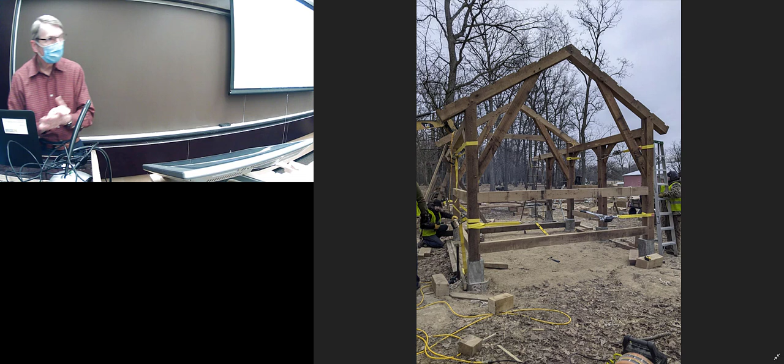Okay, a couple of different things we're going to do today. Mainly talk about I-Joists, but I thought I would show you first a couple of slides that I got from this weekend.

A friend of mine who lives over on Joy Road, just off of Whitmore Lake, not too far from here, built this little mini barn this weekend, or at least erected the timber frame part of it. So he had a little party—it was a real barn raising. Invited some friends over, and they lifted these pieces into place.

The way he did it, and traditionally, you build the frames flat on the ground, and they're all mortise and tenon and pegged. You can see there are pegs that hold it together. So there's a piece from this that goes up into that, slots into it like a pocket, and then the peg holds it.

Let me see if I can go through these slides. I don't know exactly how this is going to work. Maybe not so well. Does that do it? No. Huh. Okay, sort of. I don't know. I'm trying to see where the controls are on this. If I expand it, then I should be able to do that. But if I expand it, I don't see that. See, oh, there it is, okay.

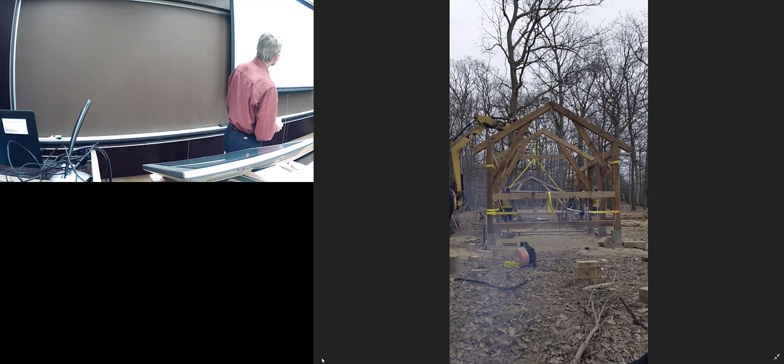So like I said, they build it in bents on the ground, and then they did have a little hoist there. Traditionally, you just lift this up by hand—people would push it and tilt it into place—but obviously a little bit easier. The red oak is pretty heavy wood, so that weighs a good bit. So they just lift it up on the straps, and then they position it.

You can't quite see, but in the back there's another couple of piers. They had concrete foundation piers that they dropped it on. There they go. And then they brace it once you get it up into place, and they put temporary bracing on it until they get the next set of beams connected to it.

So I think that's probably close to it. They just pull it. Yeah, doing it like this, it's probably a little easier because you can position it a little on the, actually lift it. Traditionally, you position the base in and then pivot it up, so it's already at the location. But this, I guess, worked a little easier for him.

Does it sit on the concrete? How does it sit on the concrete? There's a little bracket that holds it—I believe that's the way I've seen it before.

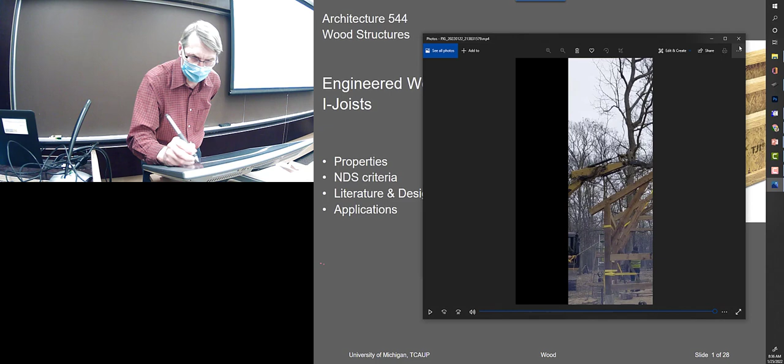Okay, so this one I should be able to shut. Oh, okay, there we go.

So this was from some pictures he made on Sunday. They did this Saturday, and by Saturday night they got the purlins up on it. You can see here pretty much how it's pegged in place. These pieces are normally a little bit higher, but I guess because it's so small, he dropped these a little bit lower. It's only about, well, he told me like 15 by 20 or 10 by 20 or something. It's not really very big. This is supposed to be for his 2 cows, I think.

But then after he built it, Sunday he was saying, I don't know, it looks so nice, whether I'm going to let the cows live in it. I may use it as something else, some other space.

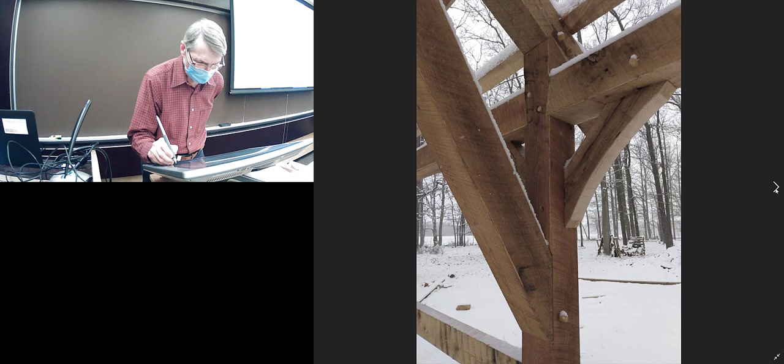Anyway, let me see if I can still go through a couple more pictures. There you can see the pegs, and there's the whole thing with the purlins on it. Pretty heavy purlins - I don't know that they needed to be that big because he's just going to put a sheet metal roof on it.

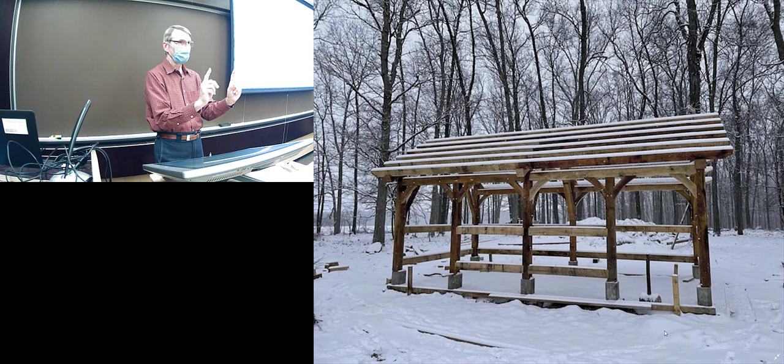And it's up on - yeah, what you can't see too well, there should be some steel brackets that attach right down here onto that were then tied to the concrete. Like bolted - you'd normally cast threaded rod into the concrete, and then you'd put the bracket on and screw the bracket down, and then screw the bracket into the wood. But I don't know, I can't quite see whether that's what they did or not.

It looks like there's a steel - I don't know, I'll have to see. I wasn't able to visit the site Saturday afternoon. My son went, and he took these pictures for me, so I haven't actually gotten to get out there and look. But anyway, thought that would be kind of fun to look at there.

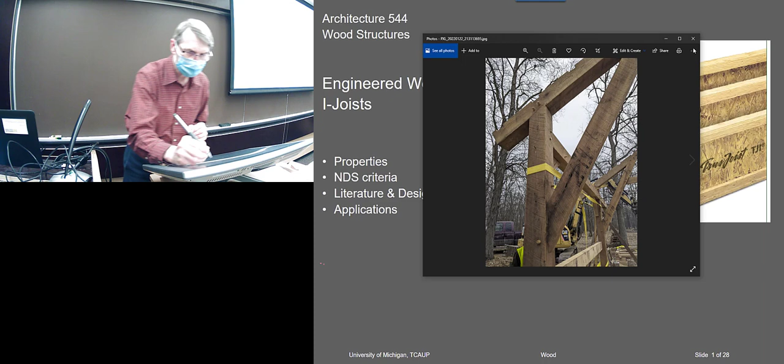Next thing we can talk about, I want to show you the wood of the day. And since that was all done with red oak, I thought, oh, how appropriate, we'll take red oak. Here's a beautiful piece of red oak, and you can compare it to the Douglas fir that's also kind of a reddish color. The color is a little bit similar - if anything, the Doug fir may be more red. But the red oak, if you look at the grain, very different grain, very typical, more grain that you'd expect from a hardwood, as opposed to this, which looks very much like the wide, broad grain of a softwood.

The other thing that oak has that really distinguishes it, and I'm not sure what these things are called, the pores - it has these darker pores. I think they're called... did it say in here? Tylosis, or something - it has some weird name. But oak has those in particular. Tylosis - well, no, I don't think that's quite it. Anyway, whatever. You can see it has these darker pores, which is typical of oak. Both white oak, all the oaks have those.

Otherwise, the red oak, too, if you look at it closely, it kind of has holes - I mean the grain has gaps in it a little bit. You look at that closely, you can see it's not as solid as even the Doug fir has. There are no little holes in it, but there are if you look. And in fact, look at the end of it - if you look at the cut end, you'll see those pores are open in the red oak. This is different - the other oaks are not like that.

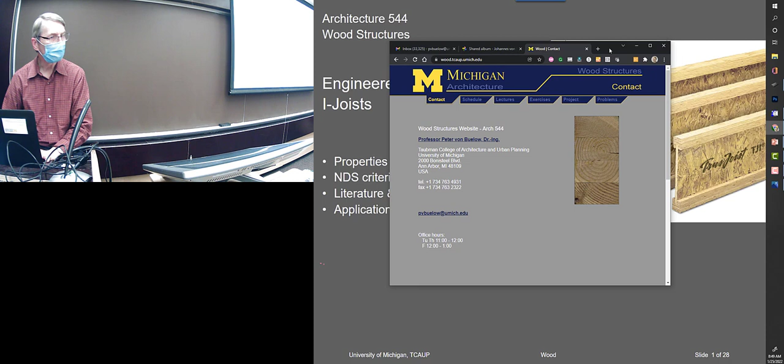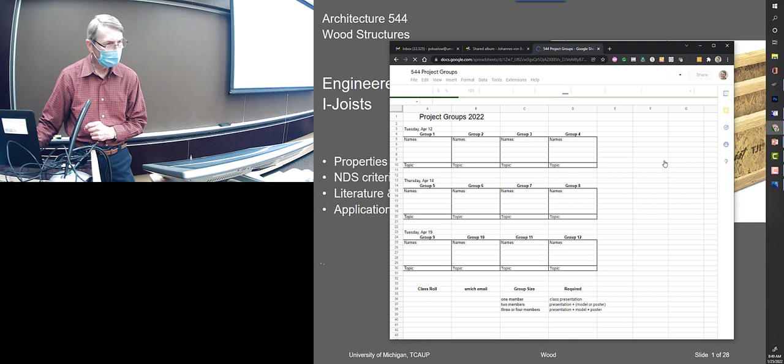Okay, there we go. A little bit here, you can look. There is, eventually for that project, a sign-up sheet. I don't think I've connected the link to it yet, I'll do that this afternoon, so you should be able to click on this. This will probably go to last year's, I bet. Oh, look at that, okay. Huh, maybe I did update it - 2022, totally forgot.

Okay, so you can go to this page, I guess, and start to choose your group, choose a topic, however you want to do that. Okay, let's see.

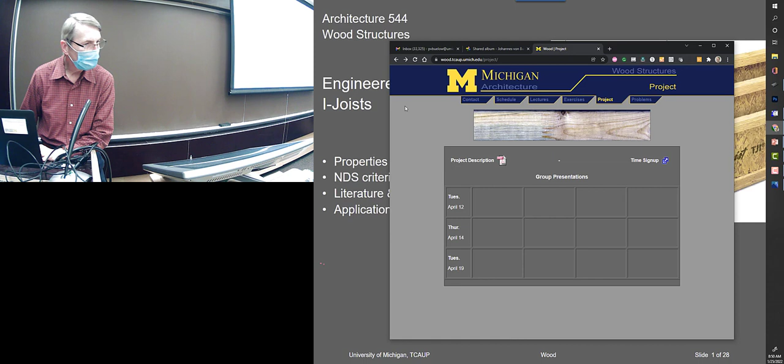The other thing I was going to point out, I went through and revised our schedule a little bit because I think we got a couple days ahead - we covered the wood beams more quickly than I thought we would. So I don't know if you pay attention to the schedule, but this is slightly revised from what it was earlier, and we are here today. We're doing I-joists actually.

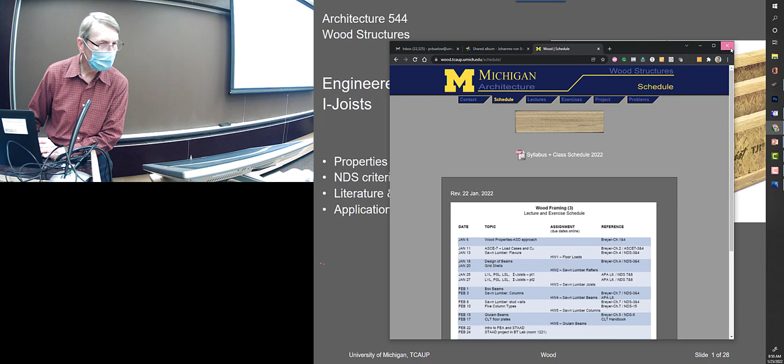Well, then today I thought we'd go ahead and talk about engineered wood products, specifically IJoists. There are sections in the NDS that cover engineered products.

Let's see what we've got here. 5 is glulam, and then we get into composite lumber, which we'll talk about Friday. That's in 8. Somewhere I thought we had structural panels, okay, cross-laminated timber. How am I missing it? Maybe it says it in here somewhere.

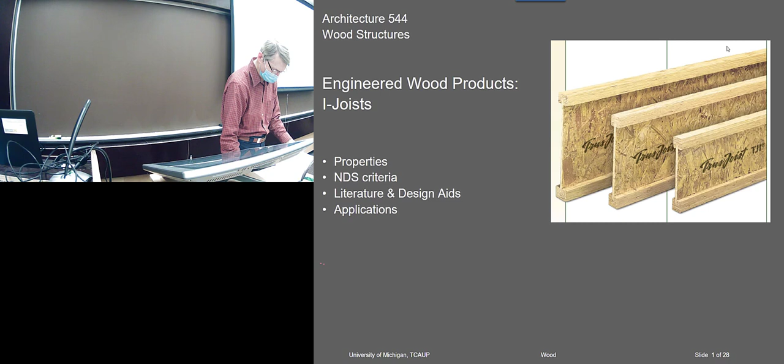So hard to keep the mouse on the... Okay, let's see if this works. Well, there is a chapter on IJoists in the NDS. Maybe it's 4. Trusses, sawn lumber. What the heck? Look in the table of contents.

Composite. Oh, here we go. Chapter 7. How did I miss that? Chapter 7 is prefabricated IJoists. But most of what they'll say in that chapter is very short, something like three pages. It refers you to manufacturers' literature. So yeah, chapter 7 is literally 1, 2, 3 pages.

Not too much there. Okay, what these are, we can pass around these samples of them, and you can look particularly at the tops of these. Some of them - this one looks like it's SPF, this one is LVL, and this one is a solid piece of wood. So it's up to the manufacturer - you can see 3 very different pieces.

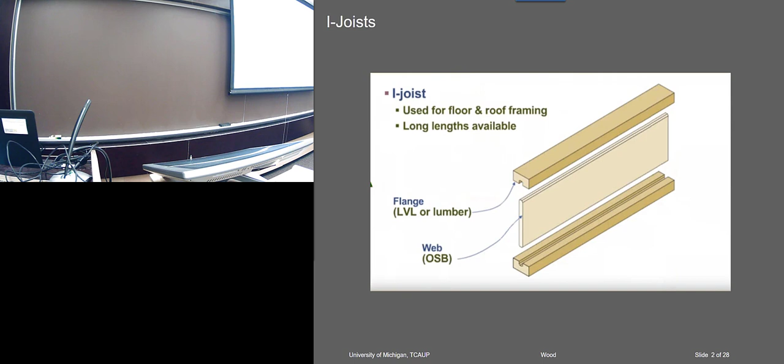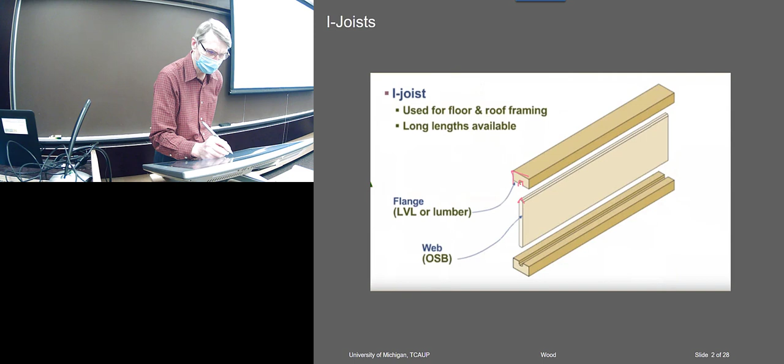The web is almost always OSB, but the web could be plywood as well. So they've got a good bit of latitude in how they manufacture these, and then they produce their own specifications in terms of strength. So you have to get all that from the actual manufacturer. But they're all fundamentally the same in that they have a flange right up here, this part that's got a cutout in it. This web then is tapered and is pressed up into that groove and glued. So then it's glued together.

And you end up with something like this versus the solid lumber like this. So you can see it's quite a bit lighter. You also have greater control over the depth of it. You can make them much deeper. Some of them are made like 30-something inches deep, quite deep, which gives them a long span. Really, the only thing that limits the span is the transport of them, right? So they could be up to 60-foot lengths, although they're usually not that long. They're usually used in residential construction, so they're more like 40-foot length max or something in that range. But they can be manufactured to be even longer. So I suppose the deeper ones probably are.

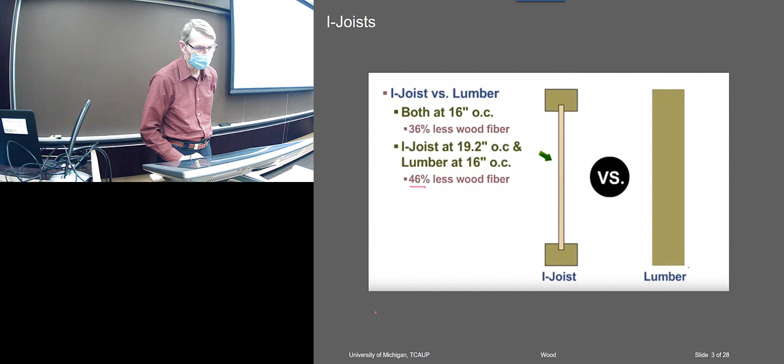46% wood, less wood. Okay, so they're lighter for sure. The only real drawback, and we talked about these before, is that they aren't really waterproof. So you can't use them in any exterior applications. You can't use them for a deck or something where they'd get wet, and that's mainly because the OSB will come apart. It's not going to be able to stand up to water. So I don't know, maybe if you made them with marine grade plywood, maybe you could get something that would be better outdoors, but I don't think anybody does that. There's no real application there.

There is quite a bit of literature, and of course you can look online and just find the APA has a big site. APA used to be the American Plywood Association, and then they kind of expanded their scope to include not just plywood, but basically all manufactured wood products. So they kept the name APA, but APA actually stands for the Engineered Wood Association. So it's kind of a funny thing - the acronym is APA, but their title is the Engineered Wood Association.

They produce quite a lot of literature, and a lot of it I've put up. If you go to our Canvas site, there's a section just called Files. If you look in that Files section, I've dumped a ton of literature that you can download. I try to keep it updated. E30 is one of the main pieces of literature - I probably even have that on here. Is this E30? Yeah, this is an older one. But it includes this engineered wood - includes the IJoists, but also, I think this is a pretty broad document. Includes all the, right, like it shows here, glulam, OSB, this is probably LVL, the different manufactured products.

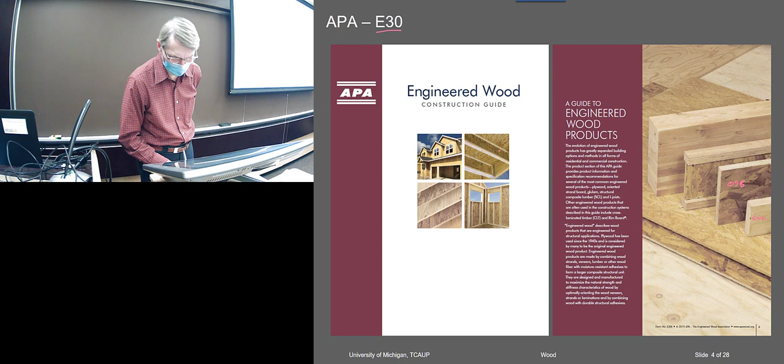They also have specific literature on I-Joists. This is APA—they're not a manufacturer, right? They're just the agency, or what would you call them? They do have some charts in this literature that give spans and whatnot, but they're not generally used for that. Yeah, here they have some span—this is, I think, 400?

No, it's a different one, but this is also APA's. The main source for when you go to design it would be directly from a manufacturer. So you'd go to like Weyerhaeuser, a big supplier, and get their literature. I don't know if I have any of theirs with me, but in the files on Canvas there's a bunch of their literature, and we'll look at some of their tables a little bit later.

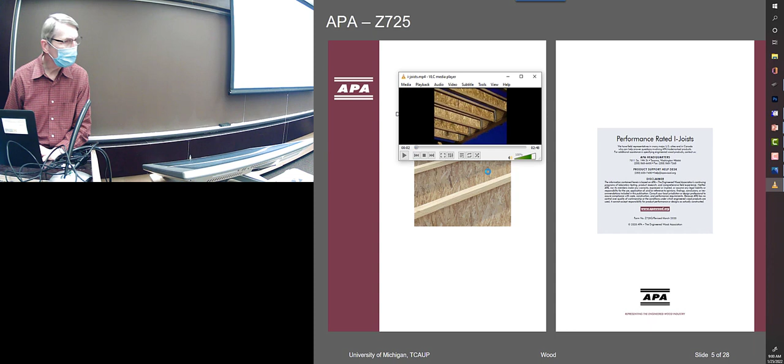Now I've got—I might be able to at least show you the video. I can't get the video to work in the PowerPoint for some reason. Okay.

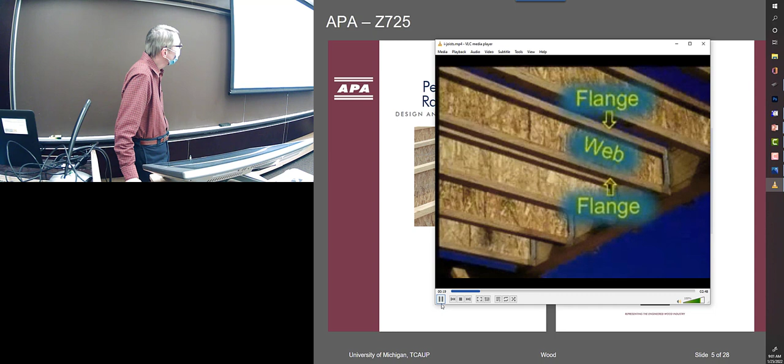Two flanges and a web are joined together to form the distinctive I shape that gives I-Joists their name. The flanges are either solid sawn lumber or structural composite lumber, usually laminated veneer lumber or LVL. The webs are usually manufactured from oriented strand board, but can also be made with plywood.

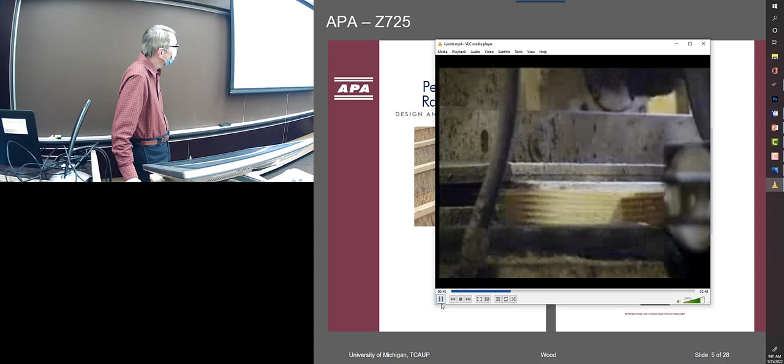The I-Joist manufacturing process begins with the production of the flange and web components. To make flanges, sections of laminated veneer lumber or sawn lumber are finger jointed at the ends with adhesive applied in the finger joint to create long lengths. In this manufacturing sequence, solid sawn lumber is being used in the flange assembly.

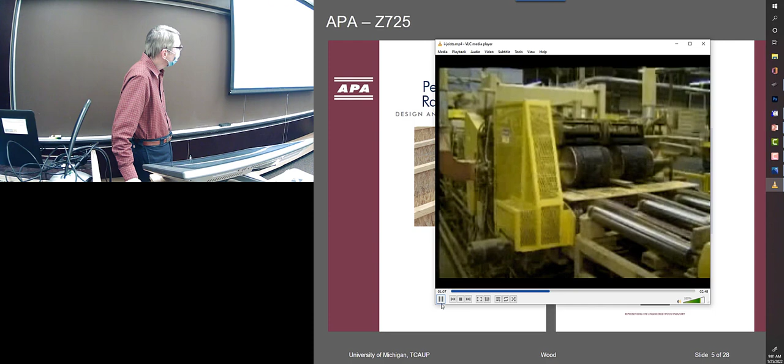In another area of the plant, oriented strand board is delivered to the line, where it is cut into 4-foot-long web sections. The depth of the webs varies depending on the depth of the finished I-joists, which range from 9.5 inches to 32 inches. After web sections have been cut to the required size, a bevel profile is cut into the top and bottom edges where the web sections will be joined with the flanges. Plywood can also be used in web fabrication.

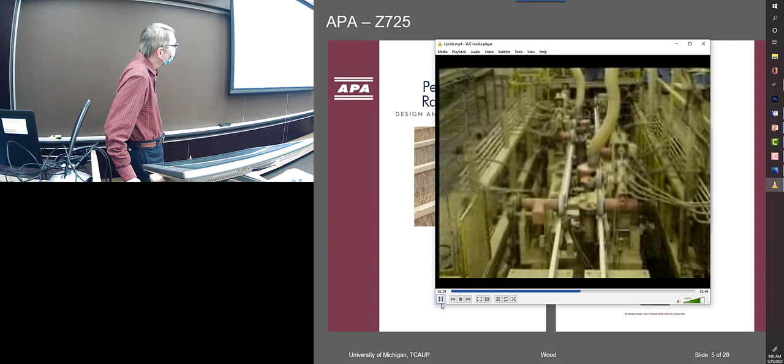So there's the beveled edge. The web sections and flanges come together in the assembler. As the flanges move into the assembler, grooves are cut in the top and bottom flanges and adhesive is applied in the grooves. In a fast automated process, the profiled edges of the web sections are inserted into the flange grooves and a permanent bond is formed.

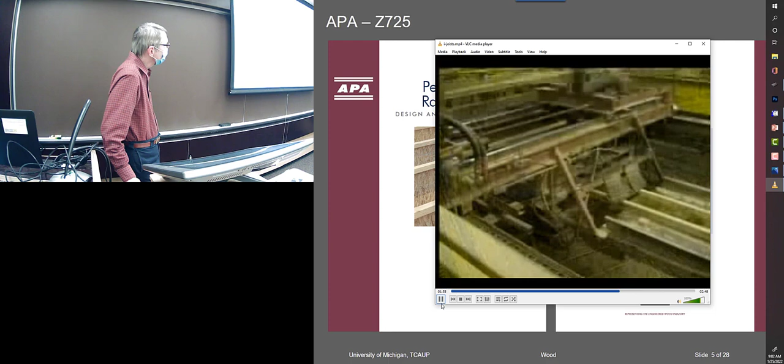As the I-joists come out of the assembler, they are cut to long lengths, with the length depending on the manufacturer—these lengths may range from 24 to 56 feet or more. The assembled I-joists are checked for glue bond integrity and other visual characteristics, trimmed to their final length if required, and then moved out into the yard for packaging and shipping.

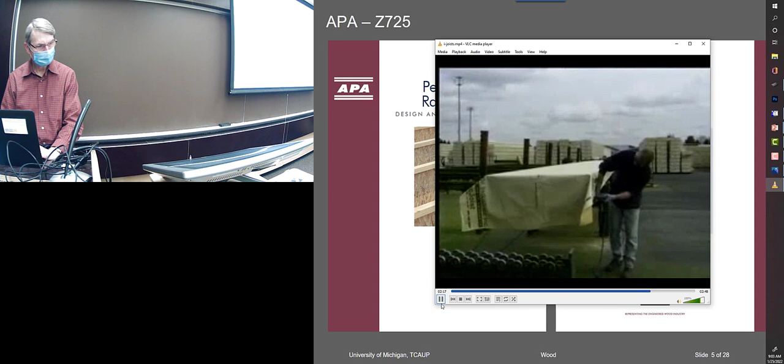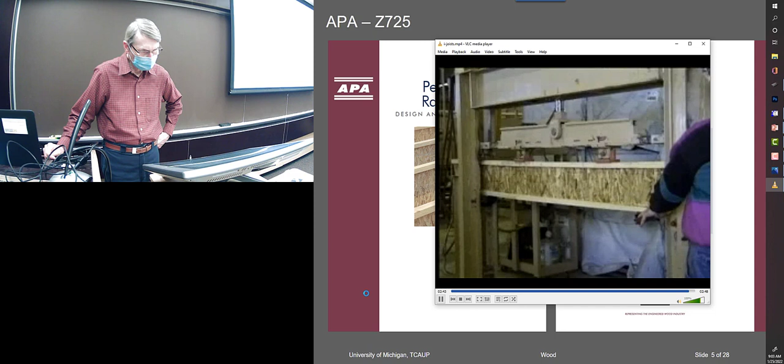Manufacturers that adhere to the APA performance standard for I-joists, PRI 400, monitor quality with a strict in-plant testing program that is audited by APA. This shear test is one of the daily quality assurance tests that is performed. Tests like this, combined with a carefully controlled manufacturing process, ensure consistent quality and performance in the finished product. Yeah, it looks like that shears right at the web—shears at the edge, I think is what that did.

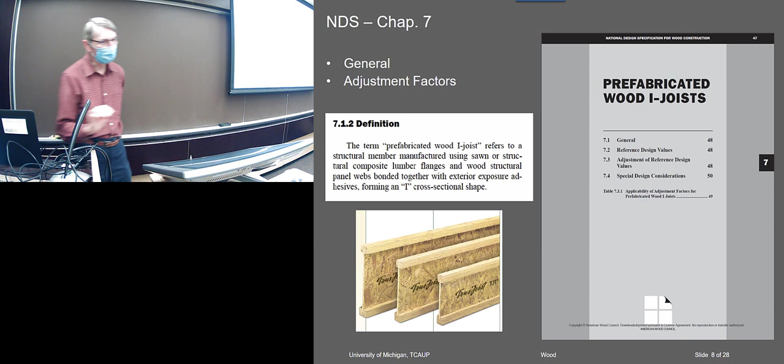There's also in the NDS, like I said, this chapter 7, and if you look at chapter 7, basically what it tells you is to refer to the manufacturer's literature, like this—reference design values. It says all reference design values for prefabricated wood I-joists shall be obtained from prefabricated wood I-joist manufacturer's literature. So in the NDS, they simply point you to that.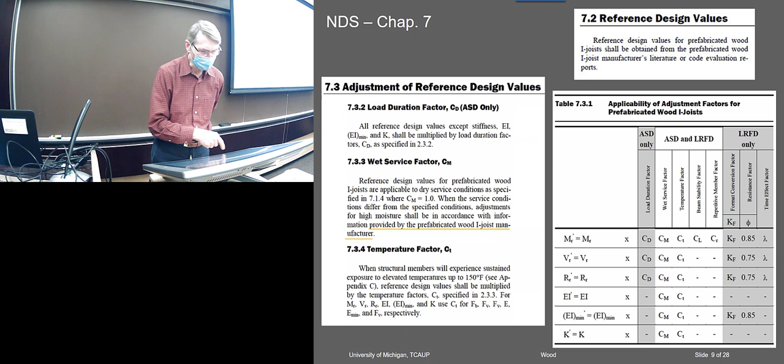They do have a few factors that you could apply. Mainly just the load duration factor would be the one that would potentially get applied. Moisture factor—like I say, generally they're not allowed to be used in moist conditions, so they don't usually use a moisture factor. Temperature factor, I guess, would be one that could be applied, but even that it's saying to refer to reference design values. Oh yeah, same as for wood—dimension lumber is 2.3.3. Okay.

All right, let's not try to play that. Okay, let's see if I can show you at least the video.

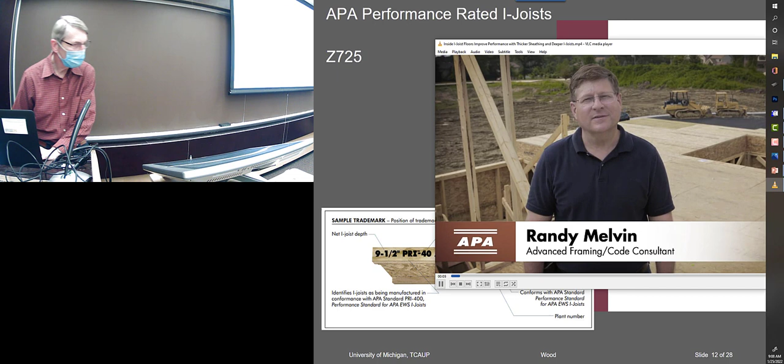Today I'll be talking about the advantages of a cost-effective wood I-joist floor system that relies on thicker and stiffer floor sheathing to deliver a premium floor assembly compared to typical lumber framing. I-joists are premium engineered wood floor system components that are capable of spanning greater distances while reducing labor costs and speeding floor construction. They have some other significant advantages as well.

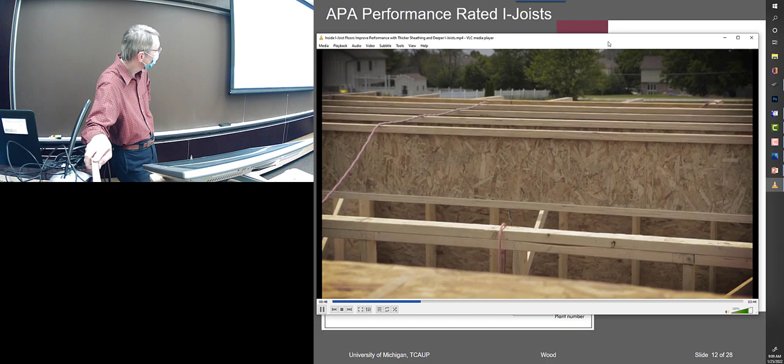I-joists are manufactured to demanding standards. Their high strength and long lengths increase design flexibility and can reduce the need for supporting beams and columns, creating the open, unobstructed spaces today's home buyers are looking for. I-joists' consistent dimensions and low moisture content mean little or no shrinkage that may cause squeaky floors and nail pops, which can result in callbacks.

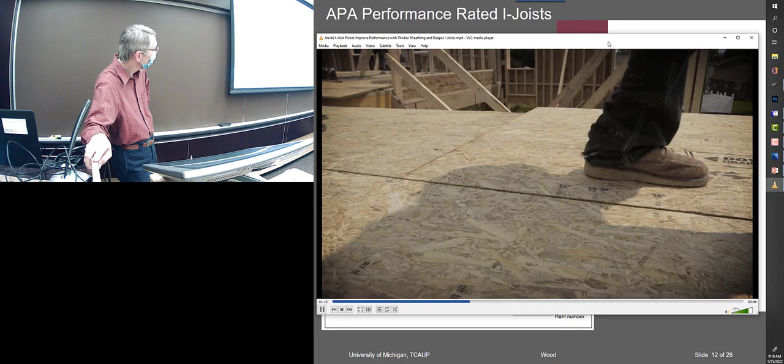The specific floor system that we see in this home uses deeper, stiffer, and stronger I-joists and thicker floor sheathing. The floor sheathing is 7/8 performance category wood structural panels. It is glued and nailed to deeper I-joists that are spaced at 24 inches on center. 7/8 floor sheathing is typically rated for 32 inches on center joist spacing, which means it provides a very stiff floor system when I-joists are spaced at 19.2 or 24 inches on center.

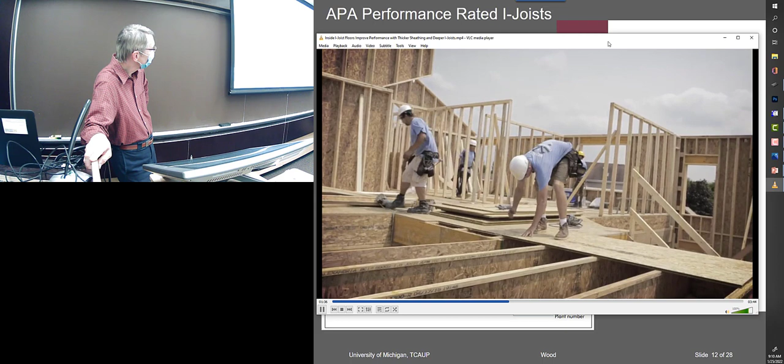Most builders appreciate the benefits of a wood I-joist floor system, but roughly half the builders in the U.S. still have not made the switch to I-joist. This particular floor system is one that builders who haven't made the switch really should consider. It uses 14-inch deep I-joists spaced 24 inches on center. There can be several types or series of 14-inch joists that can be used in such a system. Your lumberyard or engineered wood supplier can help you determine which joist to use, as well as provide you with a complete floor system layout.

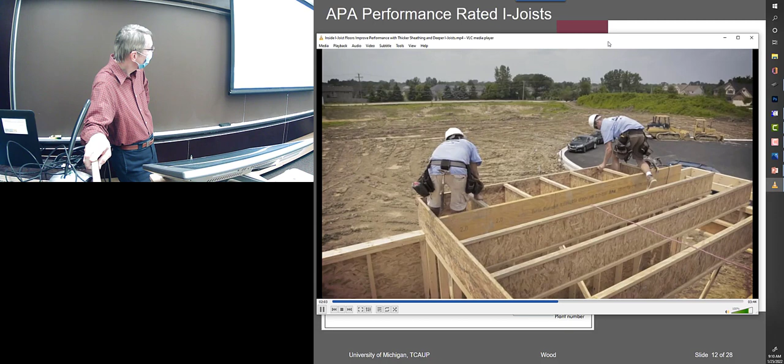The 7/8 flooring makes an incredibly stiff floor feel. The wide spacing of the joist makes it easier to keep the ductwork and plumbing within the interior of the home, which is more energy efficient and can help reduce the cost of meeting today's energy code. Even though the thicker sheathing and deeper I-joists cost a bit more, those costs are offset by the material savings alone. So you get a premium floor system installed for about the same cost.

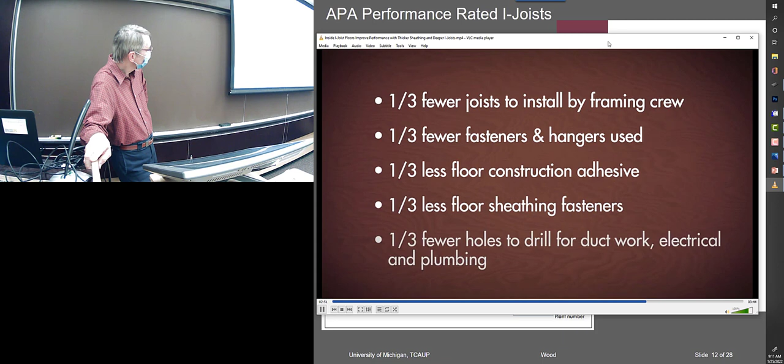Depending on the performance expectations of the floor and the loads that must be accounted for, the number of joists can be decreased by more than one third compared to the typical lumber floor system. This drives a lot of savings, including one third fewer joists to install by the framing crew, one third fewer fasteners and hangers used to install the joist, one third less floor construction adhesive, one third less floor sheathing fasteners, and one third fewer holes to drill for running ductwork, electrical, and plumbing.

Additional savings are typically realized, as is the case with this project. The deeper I-joists permit the designer to use just one joist in several places where double joists have previously been called for. The floor system also allows the home to get under roof faster, which means the interior is protected from the elements sooner, and it allows quicker returns on the builder's capital by reducing time under construction.

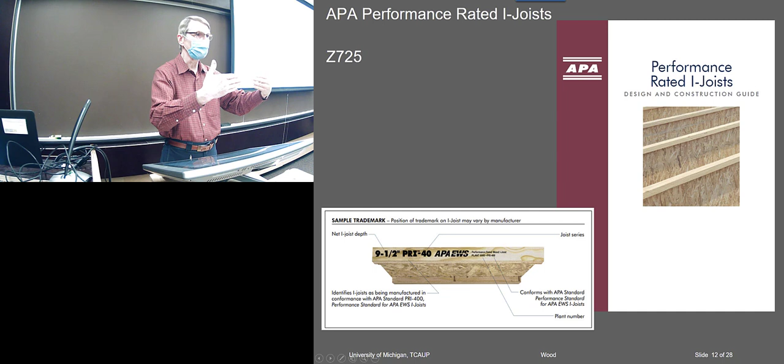The other thing I could maybe — let's see if we can — I had one other video that talked specifically about the gluing. You'll notice that all of that construction was glued and nailed. The glue makes a much better bond, you get more continuous and better bracing, and there's a lot of — even with dimension lumber, gluing is commonly used. And I think, let's see if we can.

Another important step is to use a glue-nailed floor system. Be sure to clean moisture and other debris off the joist before applying glue.

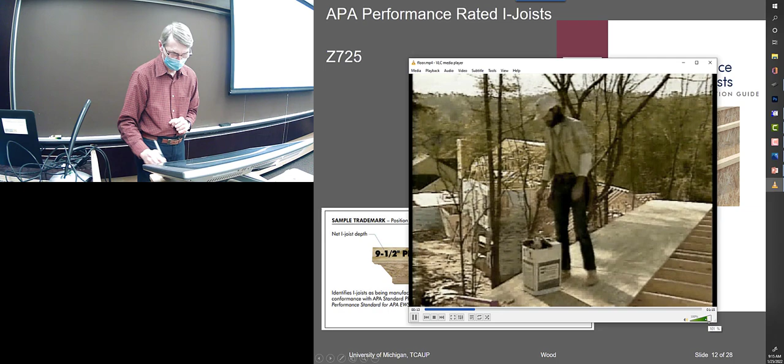Extensive APA testing shows that glue firmly secures panels to the joists and gives floors more stiffness than non-glued floors. Glued floors go down quickly, using regular construction materials and techniques.

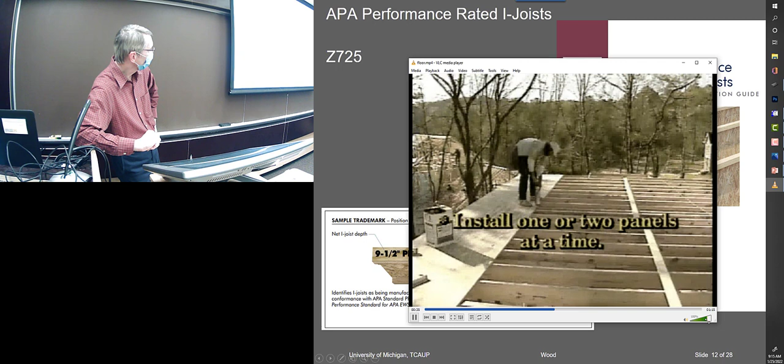Spread only enough glue to lay 1 or 2 panels at a time, so you can finish nailing or fastening before the glue sets up. Remember, warm weather will cause the glue to set faster. In cold weather, keep the adhesive cartridge warm so the glue will flow evenly.

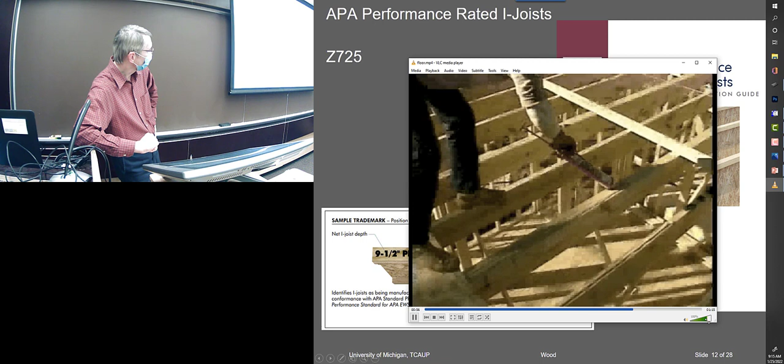Apply a continuous bead of glue to the band joist and all framing members. On wide framing areas, apply 2 or more lines of glue. Be sure to bond all tongue and groove joints together by applying glue in the panel groove. On joists where panel ends come together, apply 2 lines of glue to assure each panel end is secure.

So the gluing is a good technique. I used to have a friend that always specified glued and screwed, but it's much more commonly nailed than screwed. Although screws give maybe a better connection, nails are certainly fine.

The one thing you might watch for, if you're ever inspecting construction like this, is that the nails actually hit the joists. If you watch those guys when they nail, it isn't done with a hammer and a nail anymore - there's a gun, and it's just bang, bang, bang, bang. You don't really have a feel for whether the nail went into a board or missed it.

So what'll happen is you'll have the joist, and the decking over it, and they'll nail it here and miss the board. If you look underneath, you'll suddenly see a whole row of nails that missed the joist. And of course, that is part of the strength - you can't leave out the nails. So if somebody's missed all those nails, that needs to be fixed - they need to go back and put the nails in the right spot.

This is particularly critical for roofing. There are a lot of failures in high winds because you get a high suction load on the roof from the wind, and that'll rip the panels off. A lot of times when that fails, it's because they didn't nail it properly - they did nail it, but they missed the joist or missed the rafter. So you have to be careful that it gets connected.

Okay, so this is some of APA's literature, the Z725, and they go through and give several examples of how it's not so much tables of strength, but how you apply it, how you use it.

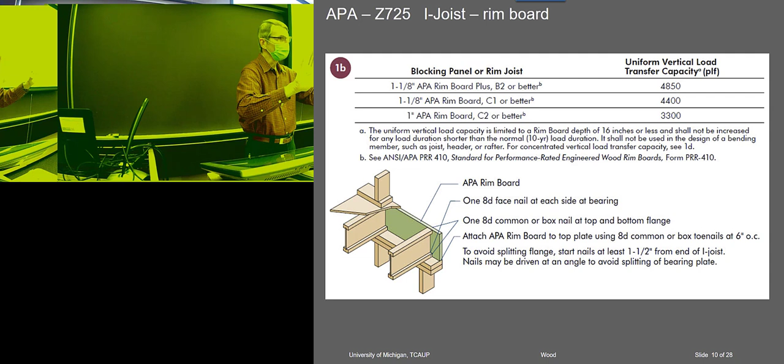And it is a system - in that video they were showing the layup of it, and they were using 7/8 inch OSB on top of it. There's also, they didn't mention, a rim board that goes around the edge that provides end bracing. You have to use the correct rim board with it.

And they deliberately make these things different sizes from the dimension lumber. I'm not sure exactly - I think maybe it's 9.5 instead of 9.25 - but if you put dimension lumber next to it, it's a different size. They do that deliberately so you don't mix it. They don't want you to use this and then dimension lumber together - you're not supposed to mix it.

You're also not supposed to mix it like for the rim board - you're not supposed to use dimension lumber. You're supposed to use either LVL or some piece that's manufactured specifically as rim board for this application.

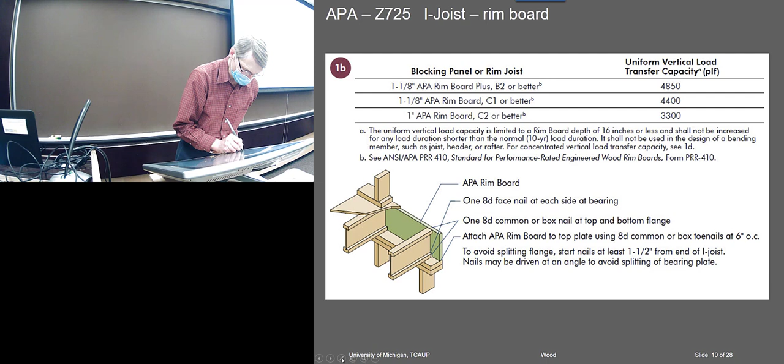I don't know if I have one in here that they show. Let's see - this is different methods for bracing. Here they are using, I believe, dimension lumber is sometimes used for bracing because it deliberately leaves a gap there due to the different expansion rates.

But this would be to strengthen it over a support. So where you've got this coming in, particularly if there's a mid-span support, that would put a lot of shear on the web, and there'd be a danger of the web failing in shear because of the high shear at the support.

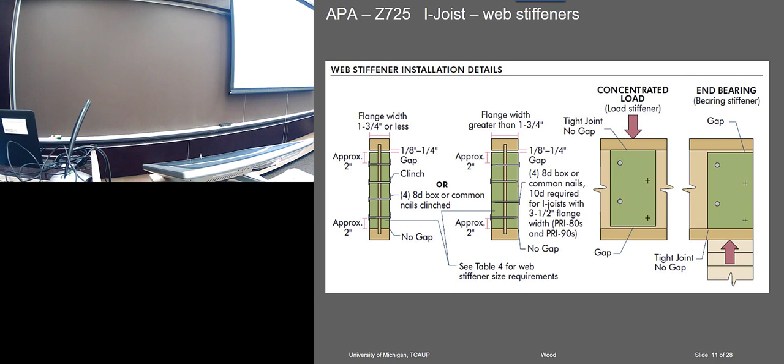So to strengthen the web, they'll nail in bracing. There are specifications for how long that bracing has to be and where it's placed. These may be in this piece of literature, but they're also in the manufacturer's literature, where you can see tables of exactly how big that should be.

The other issue you deal with are holes. A lot of times they'll cut a hole — look at this, they've punched a hole in it already, and all you have to do at the site is push that out, maybe with pliers or a hammer. You can see they pre-cut that hole, and they'll do that with bigger holes as well.

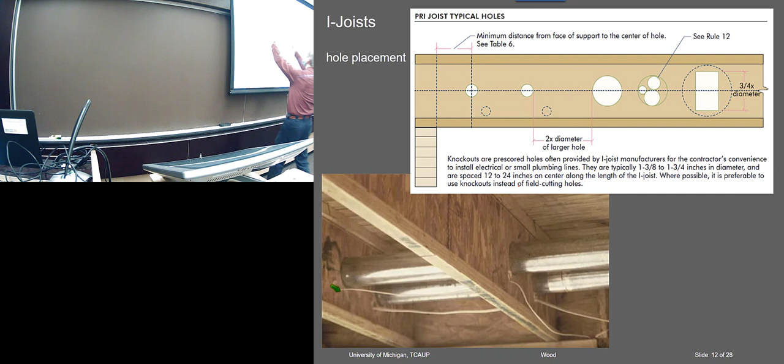They tend to put them in the right locations, but maybe not so carefully. There are limits — you don't want these holes where the web would be subjected to high shear. The web is always weaker in shear; the top and bottom flange take tension and compression from bending moment, but the web carries the shear. So wherever there's high shear, you have to be careful not to damage the web. At the ends there are limits to the minimum distance from the edge support, which has to do with the shear.

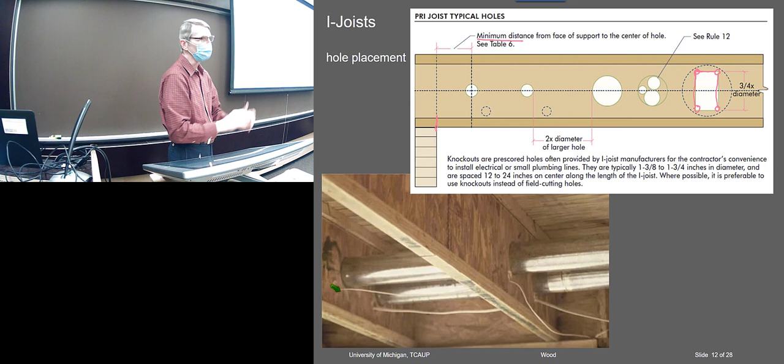The other thing they generally try to avoid are sharp corners. In the ones manufactured with cutouts, they give you a nice circle. If you can't do that, you at least cut circles at the corners and then saw it around so the corners are rounded, because a sharp corner creates concentrated stress and there's a danger it would crack. So rather than risk that with a big hole, they usually try not to make them rectangular.

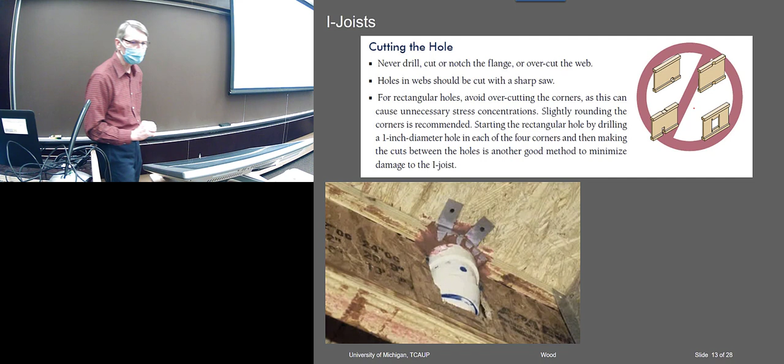Most of the stuff you're running through it, like ductwork, is usually circular. I guess we have square ducts too, though — you have to be careful with those.

Do not do that — never cut through the top or bottom flange. That would be a big no-no right there; that destroys it, of course. So any of these where they're cutting through the flange, or this situation without those circles — they should have a circle cut first there to give it better stress distribution.

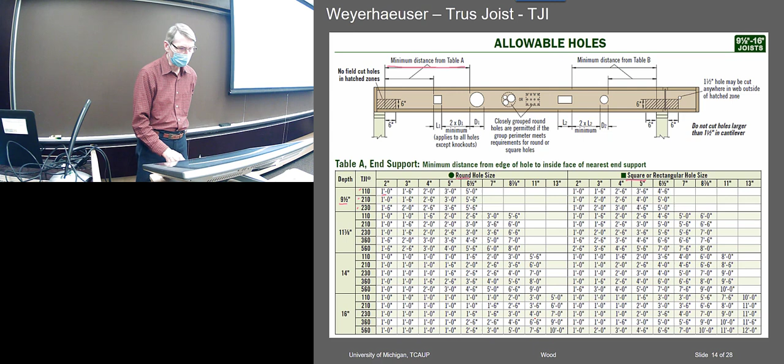This is probably Weyerhaeuser's literature, typical of the manufacturer literature. You can see they get very specific in the table for the exact depth and grade — there are three different grades — then the distance, the size of the hole, and the end distance, this minimum distance. You read that distance right out of the table, either for round holes or square holes, depending. So based on your size and the size of the hole, you can see exactly how far it has to be spaced.

Weyerhaeuser also has a bit more description of the whole system. Here's a cantilever with bracing the cantilever — that's against shear in the web. Here's an attaching piece, so they brace that. The rim board is shown here — here we go, the rim board.

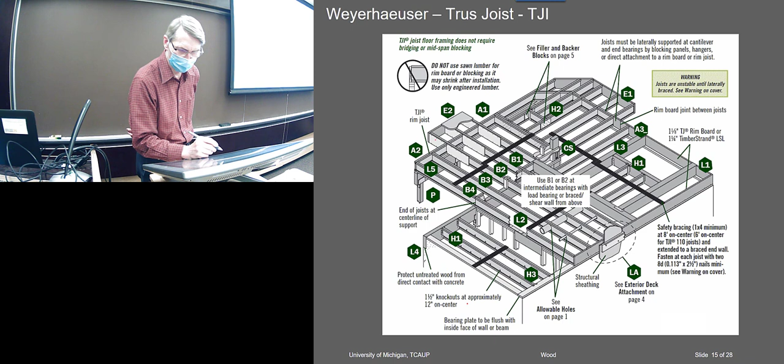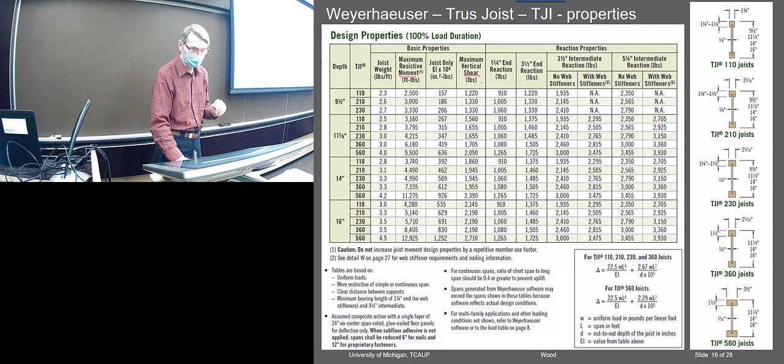This is some of Weyerhaeuser's properties table. They give properties tables kind of like the NDS properties, the different stress limits, although they'll do it in terms of force — so moment or shear — and then they'll also give EI, and the maximum end reaction allowed.

You can look in this table — this isn't a span table, this is the actual moment. So if you had an unusual condition, maybe with some point loads rather than just a regular uniform load, since all the span tables are just set up for uniform loads, you'd use this instead.

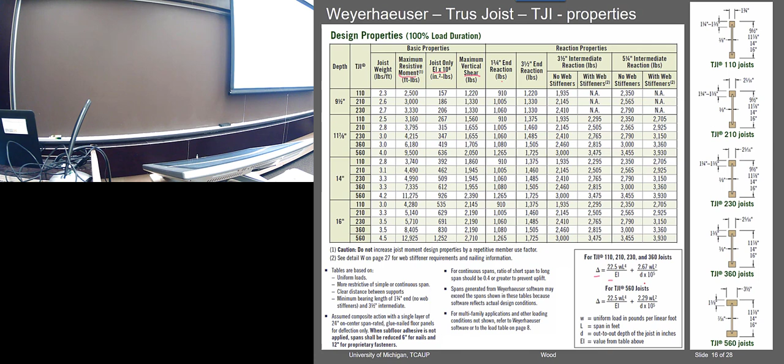So if you have anything unusual, you calculate the moment and the shear, and then you go to a table like this, which also does the deflection calculation. This is your regular bending moment, and then you have the web shear deflection. Normally any beam has deflection due to shear, but it's usually very small, so you just neglect it. But with these, because the webs are a little weaker and particularly susceptible to that shear deflection, they'll include the shear deflection in the deflection calculation. So that's what that second term is there. Those are simply the equations you'd use to calculate deflection.

Okay, so what else we got? This is a typical span table. It's set up for a deflection limit, the live load deflection of L over 360, and you've got a choice of either, these are residential loads, 40 with a 10 PSF dead load or a 20 PSF dead load. So depending on your dead load, that pretty much covers what you're likely to hit in residential construction. Then you just read it out of the table for any particular size, particular grade, and then the on-center spacing of them.

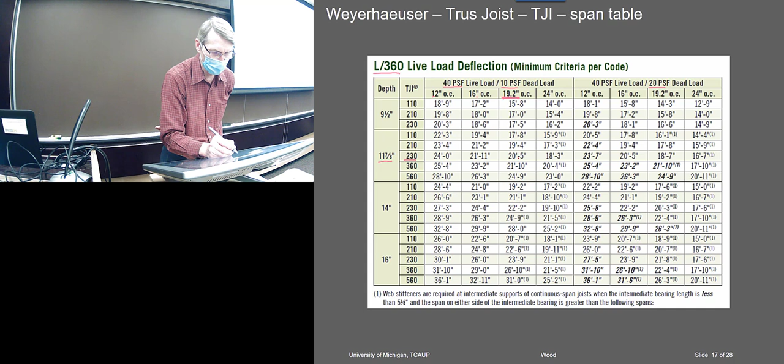This 19.2, I think that must be 5 — if you take an 8-foot sheet and divide it into five sections, that's where that 19.2 is coming from. And then you just pick your span out of the table. So your load, your type, and your spacing, and then you'd have a specific span that you could span, 19 foot 4 inches. So as long as you don't exceed that, that's all the design you'd need to do.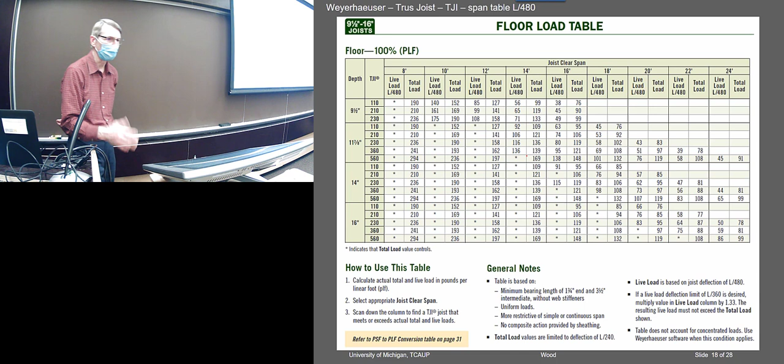This one is for a stiffer floor, L over 480, and here they show both. I think this is the limit — this is being limited by the total load, and this would be the total load limited by deflection. So here the total load by strength would be 152, but if you're limiting it to L over 480, then it's a little bit less, it's 140. And the ones with the asterisk would meet that 190 — in other words, at 190 it would meet the L over 480 criteria.

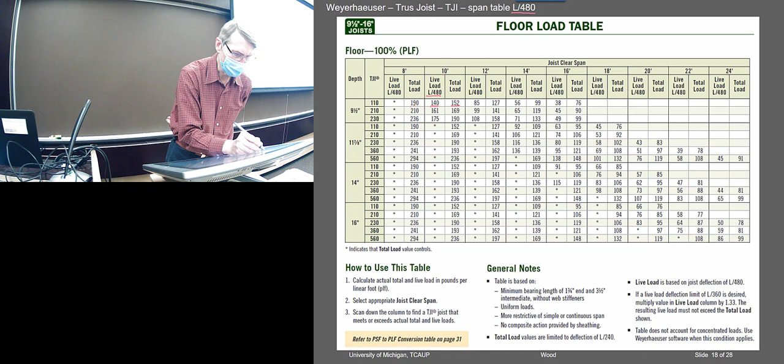So again with this, you are able to — well, this is a load table, right? It's not really a span table, I guess you could call it that. These are all the different spans. It gives a span, and then you pick the load for that span and the member. So you're able to read the load capacity off of it. It's a load capacity table, really.

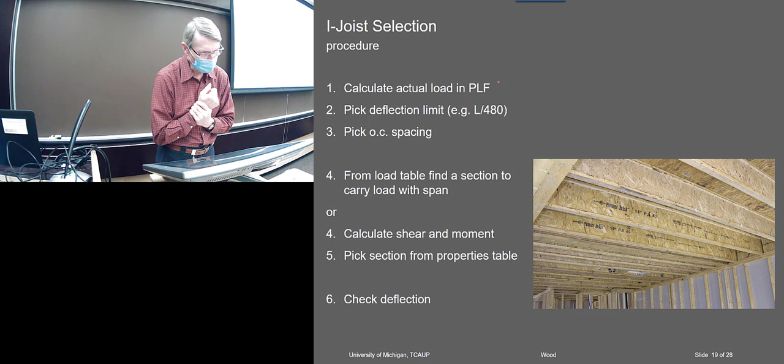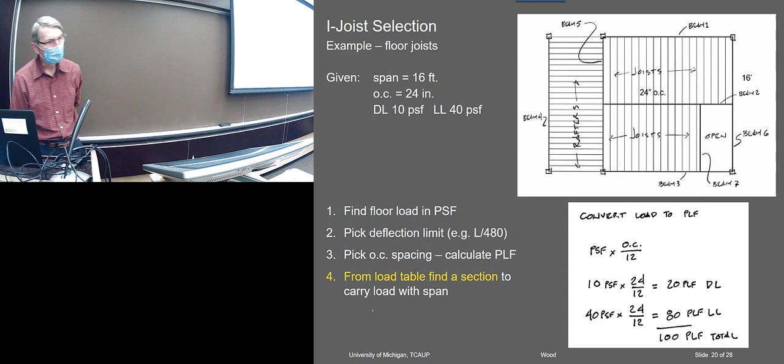Okay, so let's see, we can even do an example here. This is supposed to be an example of joist selection. So first you got to get your load, then you decide what your limiting deflection is going to be, either the live load of L over 360 or the 480 limit. Pick a spacing, and then you just go to the table and pick your span. Or you can calculate the shear and moment and do it that way. Okay, so let's try it, there's a little example, we'll do one of these.

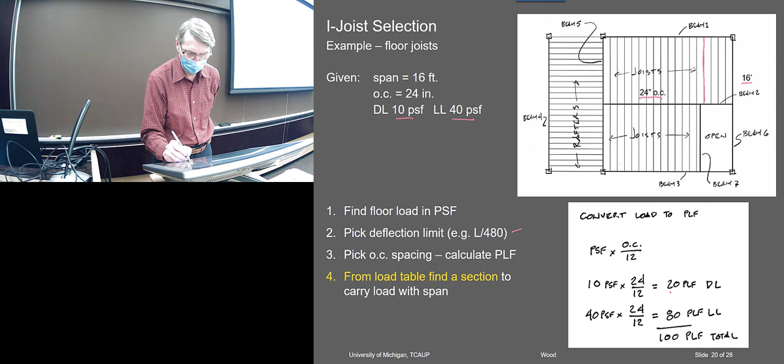I think this is based on one of these guys here. Has a span of 16 feet, they're 24 inches on center, have a dead load of 10 PSF and a live load of 40 PSF. We'll see, it depends on the tables as to whether you're at the L over 360 or 480. So here's the total load — if I want to use those total load tables, this is 24 inches on center, so the dead load would be 20 PLF, the live load would be 80, so I got 100 total.

I could go to this table that gave me the loads. So if I want to do it based on that, here's my 16-foot span, and if I want to limit it to L over 480, then the live load would be at 80. And actually my live load was 80, that's what I had for the live load. So that would pass this, and the total load could be as high as 119. My total load was only 100, so it would pass that one too. So that would work — these are different grades, and this would be the depth, an 11 7/8, 230.

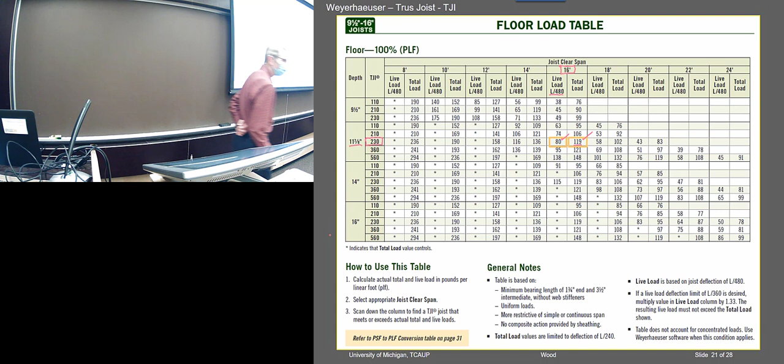They probably have that stamped on them, don't they?

I thought some of them did. Well, maybe I'm wrong. Okay, they usually have that grade stamped on them so you can see what they are.

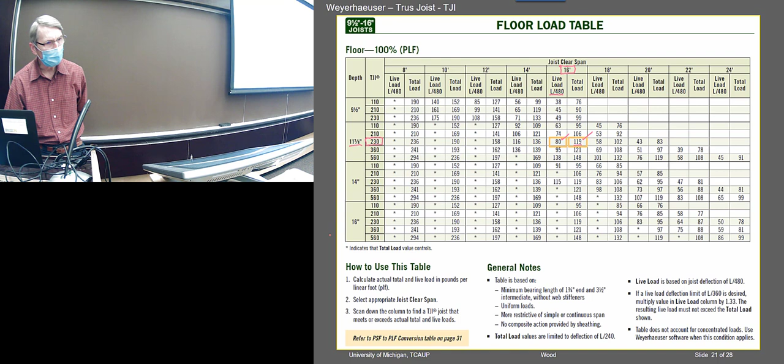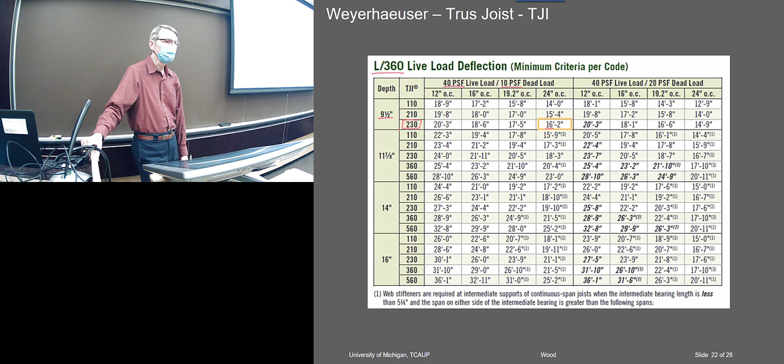So if I don't need the extra stiffness of the L over 480, I could drop down. This would mean my floor would be slightly more bouncy, right? This is the traditional IBC limit on deflection. I think this is what they give as L over 360. That L over 480 is more recently been touted as sturdy floors. They're extra stiff floors, and they really are only achievable - I think they really only meet that with these deeper I sections.

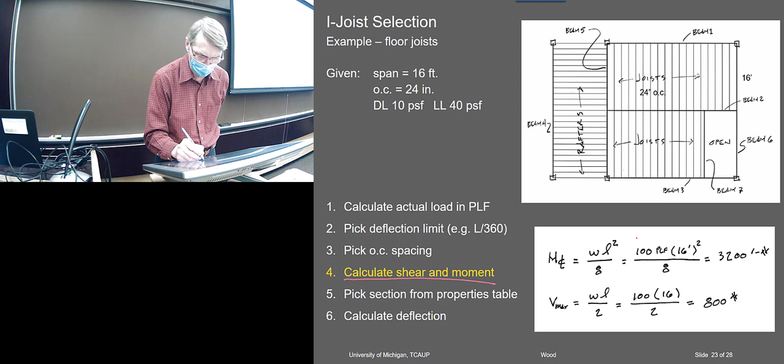Okay, so this is then the same problem, right? But this is with, if you want to calculate it by calculating the shear and moment. Remember, there were other tables that gave the properties. So if I go through and calculate the shear and moment, this is based on a total, right? This was the total - this was the 80 plus 20 PLF. So that comes out with a total moment of 3,200, and the shear is at 800. Okay, so then you can go into their table here, and it looks like this same one does pass.

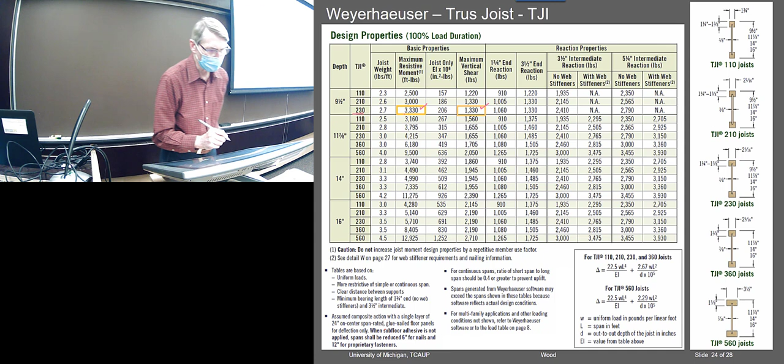Now this, I'm not - well, maybe I do have to calculate the deflection separately. So here is the, what did I need? 32, and I've got 33, so that passes, and this is way high. I think I only needed 800, so that one would pass, right? The next one down would fail, though, because this one would be too weak, but that one would pass.

I could go to a deeper one. I could have picked one like this. Oh no, that one would fail, but this one would pass. Right? I had 32 - I think wasn't that what my moment was? Yeah, okay, 3,200. So that one would fail, but this one would pass if I wanted to do it with a deeper section. And it's a slightly lower grade, 210.

I'm not sure what that comes from. Okay, so then we can also calculate the deflection separately. I think I did that here. So here's the deflection calculation. This is the...

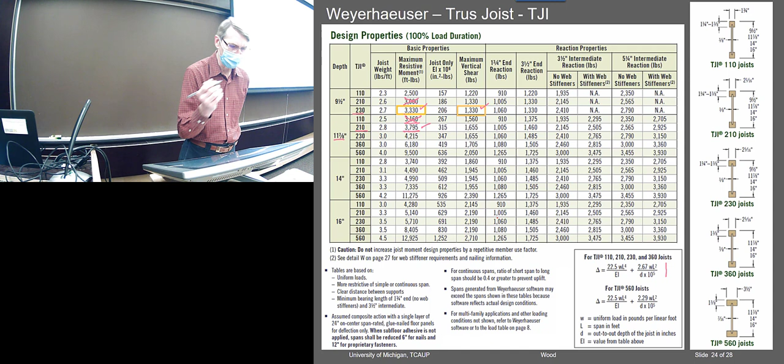EI value that was out in that other table, I believe. Let me check. 200... where is it? Okay, take it back. I guess it's in yet another table. I thought it was in this properties table, but they're in the same literature. There's another something. Oh, here it is. No, I'm sorry, I'm not paying attention. There it is - 206 times 10 to the 6th. Okay.

So that's where that came from, 206 times 10 to the 6th. And right, and then we multiply, and I'm using the depth - there's the D for that 9.5 member. So the shear deflection, it's small, but it's not totally negligible, right? That's the shear deflection, and this is the bending deflection. So it totals out to be a little over a half an inch, and the limit on L over 360 is...

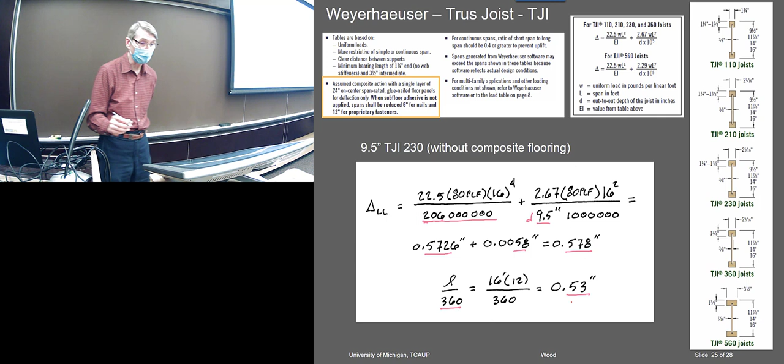Actually, so it looks like it would actually fail that L over 360. So I don't know, that other table indicated that it actually passed, right? The L over 360 - I mean, it's pretty close. Maybe they figure that's close enough, or I don't know, but in their other table they showed that as passed. It definitely fails the L over 480. Anyway, so for what it's worth, that's the actual deflection calculation then.

Okay, I think we've gone through enough of that. You can have a look at the literature that's up there in the Canvas site, and it should, like I say, I hope it's up to date. But you probably should just make a note - you might want to go to the Weyerhaeuser site and just look at the information they have, or APA.

There's another one - I guess Trus Joist is Weyerhaeuser, isn't it? There's a lot of literature that's - Trus Joist is spelled with one S, TRUS/Joist, and I think that is Weyerhaeuser that produces that, maybe one of their trade names. Anyway, you can have a look, and as far as designing goes, it's mainly done just with the tables. You get the manufacturer's literature and pull the pieces out of the table.